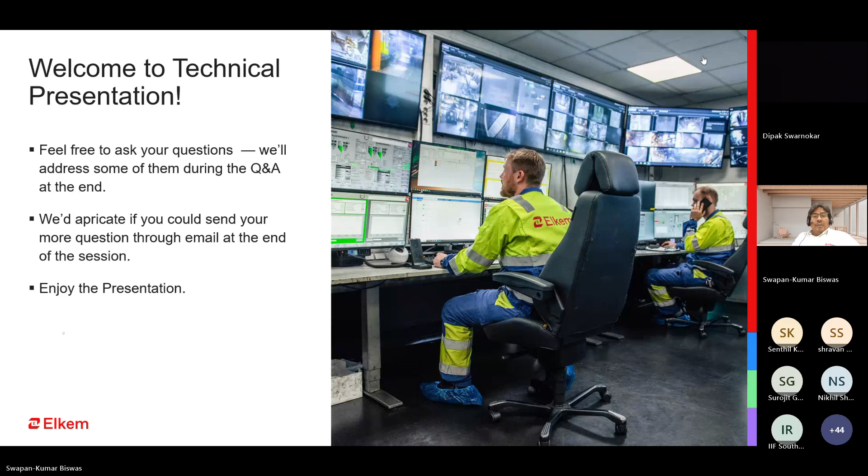I'll give some background. From 1943 you can say ductile iron production started with pig iron, but now there are a lot of changes. If you think about ductile iron production with pig iron, everybody will think twice, but that was the beginning. Now there are a lot of changes—thinking process, raw material availability, and expertise helping foundry personnel improve the metallurgy.

In ductile iron or gray iron, you always need to focus on the nucleation booster—that is primary from the liquid metal. Whatever casting process you are applying, first you have to think, when metal is ready, what is the nucleation level. Gray and ductile iron are the same when the metal is inside the furnace, but after magnesium treatment, that metal converts into ductile iron.

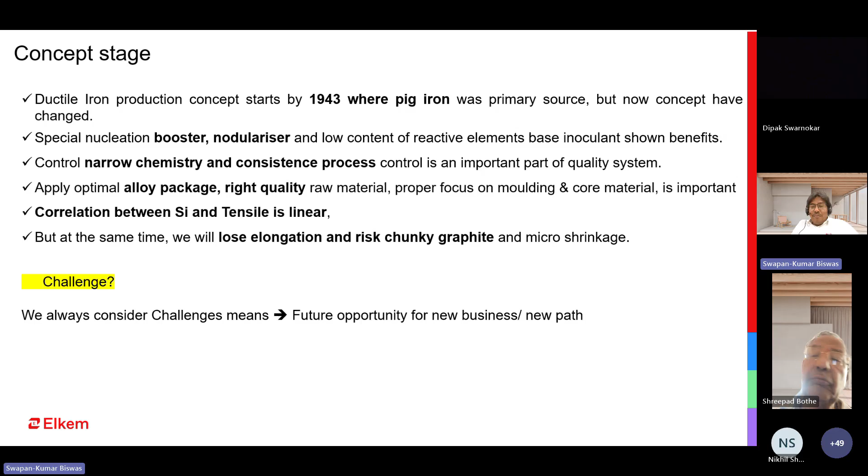Everybody knows there is a relation between silicon and tensile strength—it's linear, but when you increase the silicon level, there will be other problems, like chances of chunky graphite. So you have to decide which is the best option. When you take care of these challenges, it will definitely give a new business path and new opportunity. Challenges should be accepted and worked on—there will be a positive outcome.

Due to the complexity in casting geometry and stringent requirements, predicting shrinkage behavior in ductile iron is more crucial for successful foundry operation. This shrinkage is the most common defect in both gray and ductile iron, but identification is most important. Normally, most foundries study only a few defects—slag or sand related defects, and gas or blowhole—but very rarely do they check the micro structure to find out the type of defect, whether shrinkage, gas related, or nitrogen in case of gray iron. It's very important to identify the defect before taking corrective action.

Otherwise, whatever action you take may not give the outcome or result quickly. So it's important to study the microstructure when facing any defect, and decide which type of defect it is, then you can take corrective action. Optimal treatment package is also very important—it helps get a consistent result considering metallurgical and mechanical properties.

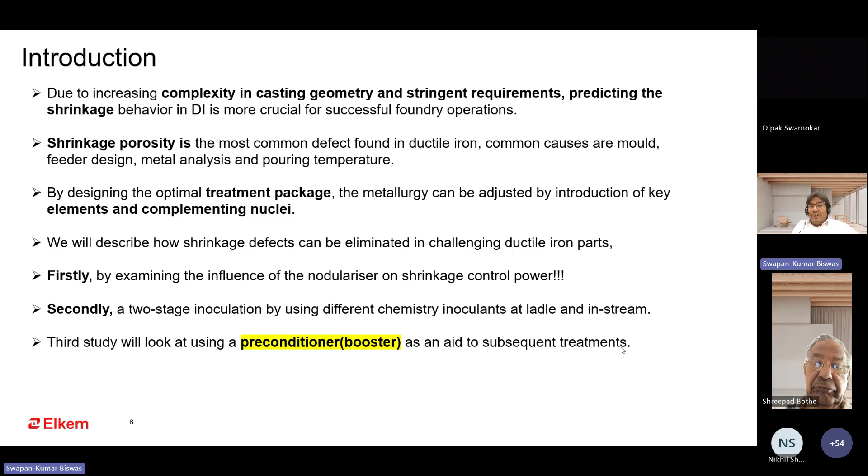So that is also most important. You need to check your metal nucleation potential before taking this action. Then it will help. So in shrinkage phenomena, then you can see this slide.

When metal is in the liquid condition, this volume is more. But when that liquid metal converts from liquid to solid, when solidification takes place, there will be graphite precipitation, and there is a huge expansion in volume. So that is the most fundamental.

So whatever carbon you are using in the furnace, that recarburizer should convert into free carbon, which is called graphite. When your graphite precipitation and distribution is very good and definite, it will help to control most of the metallurgical related defects.

This is when expansion is going on with this graphite, so you need more graphite precipitation. During solidification, everybody knows there will be contraction as a metal phenomenon - it will contract, and when this graphite precipitates, it will expand. So when these two parameters are almost similar, then you will get defect-free casting. So graphite precipitation is in our hand, but during solidification metal contraction is the metal's characteristic.

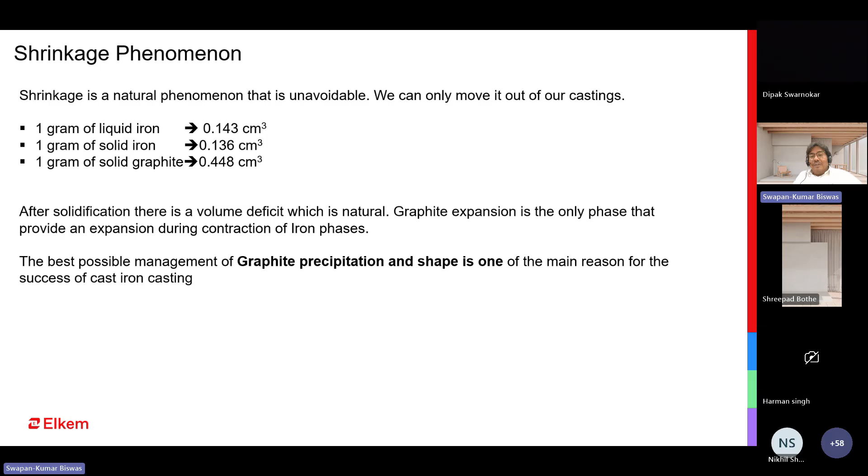So always tap metal as quick as possible, within 1 minute. Then it will give better magnesium recovery. So that part needs to be taken care of during the production of ductile iron.

So there are three different categories of shrinkage - one is physical, chemical, then third is process related. In physical related, that will be the mold or your gating system, sand metal ratio. So this part needs to be taken care of to overcome shrinkage related issues.

In case of chemical factor, carbon equivalent is the most important, along with other trace elements, especially chromium, titanium, vanadium, antimony. All these trace elements need to be considered.

Also another parameter is the residual magnesium. Most of the time, foundrymen think that if residual magnesium is on the higher side, then there will be no compacted graphite - that is correct. But on the other side, it will increase the shrinkage tendency, because magnesium is a very strong carbide promoter.

When your residual magnesium is on the higher side, there is always a tendency for carbide formation, and you will get less nodule count. When nodule count is on the lower side, then your shrinkage tendency will increase. So on one side you are protected - there will be no compacted graphite due to high residual magnesium - but on the other side you will face other metallurgical problems. So optimum residual magnesium is the most important factor for ductile iron.

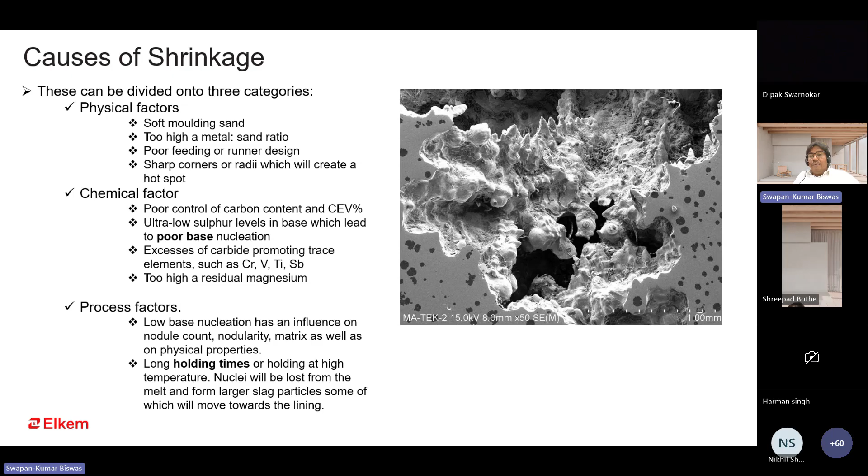There is one case study on how this shrinkage is eliminated. There is a lot of other information, but here is only the outcome of our exercise. So there are two pictures on the left side, shrinkage versus residual magnesium.

When your residual magnesium increases, there is always a tendency for more shrinkage. And another graph shows magnesium content with nodule count. You have seen lower residual magnesium always gives a higher nodule count. That means high nodule count helps to control your metallurgical shrinkage.

So on the right side, there are two pictures using two different packages. One is the left side graphite structure, containing ferrosilicon magnesium with mish metal content and calcium barium based inoculant. But on the extreme right side, there is lanthanum based ferrosilicon magnesium, with cerium based inoculant, specially coated with oxygen and sulfur.

So in both cases, you can see there is a huge difference in the nodule count. Both are the same metal, same chemistry, but the two structures have different graphite formation. So when your nodule count and nodularity increase, you are able to eliminate micro shrinkage or micro porosity. With the help of better ferrosilicon magnesium and cerium based inoculant, it helps to minimize or completely eliminate the shrinkage defect.

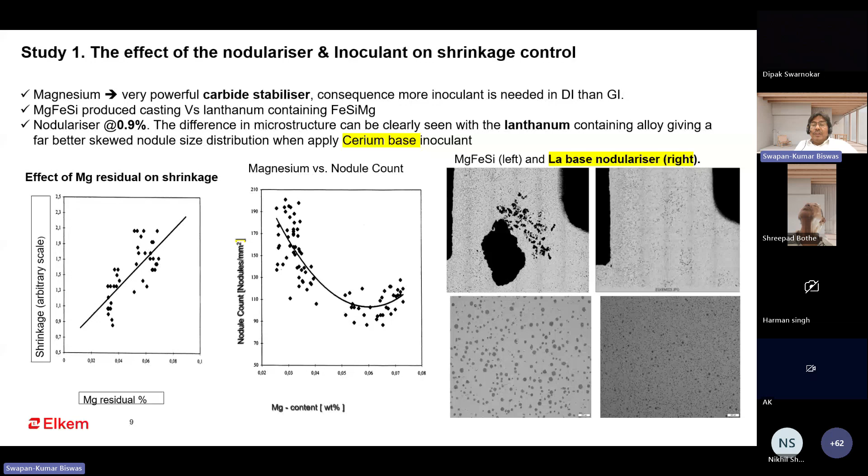So the best possible way to cure this shrinkage, you have to follow the correct carbon equivalent and carbon-silicon ratio. Also control the residual magnesium and sulfur level. You need to check the nucleation by adding a long-lasting preconditioner, which helps to maintain the nucleation level for a longer time.

Also, to overcome this microporosity, you have to select an inoculant which can provide secondary graphite precipitation. In most cases, calcium barium gives a huge number of graphite precipitations at the initial stage, and later there will be very few nodules or flakes forming. So you have to select an inoculant that provides graphite precipitation from the starting to the last stage of solidification, which helps to control the microporosity.

When initial graphite precipitation is high, there are always more chances of expansion. But at the later stage, there is no nucleation site to create the last stage graphite expansion or precipitation. So only cerium containing inoculant gives primary plus secondary graphite precipitation. You have to select this inoculant along with your ferrosilicon magnesium to help control the microporosity. With barium base alone, you will not get 100% benefit to control microporosity.

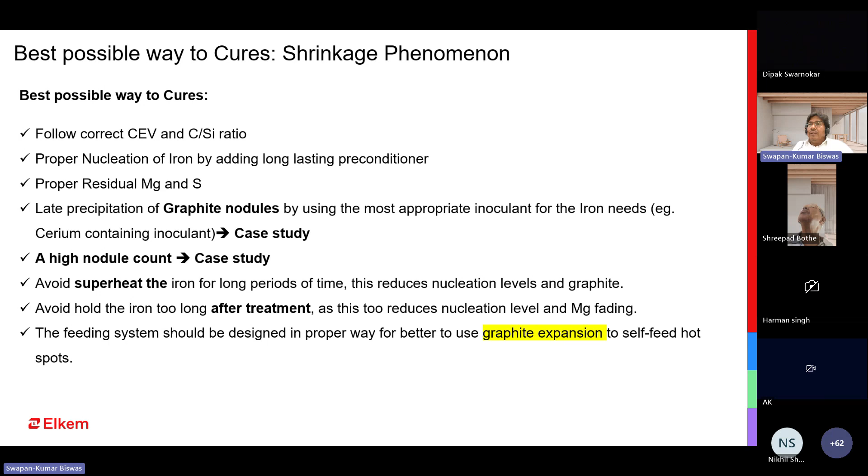So this is one case study where the customer was facing a metallurgical challenge, especially shrinkage. But with this casting, with the help of a high performing inoculant plus magnesium combination, they were able to produce defect-free casting even without a riser.

That is the initial stage when our team member visits various customers. We always try to collect information on the existing condition, because whenever you do any activity, you need to know the starting point. So then you can take corrective action. Without this information or the starting point, you cannot decide the next course of action.

Then based on their initial information, we suggested a package. In most cases and case studies, we always recommend a preconditioner, because this is the primary action and it helps to overcome a lot of variation. Because when your metal condition, meaning your metal health, is on the better side, definitely your outcome will be better.

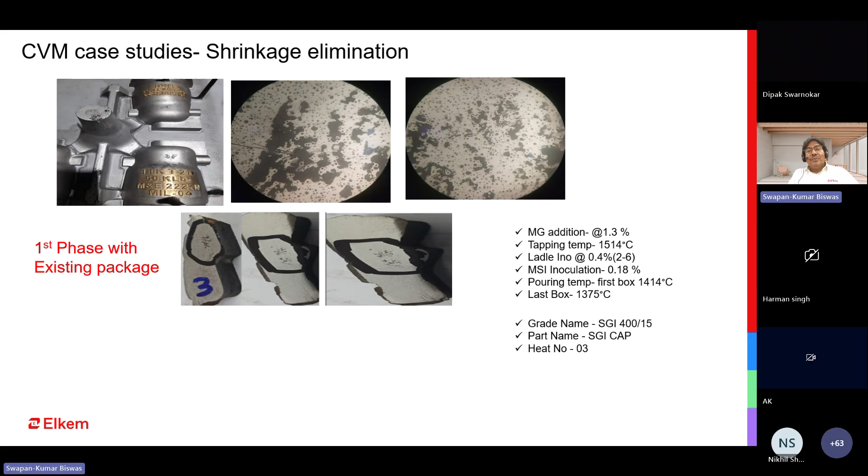In the last stage, you can see there is a huge change in the microstructure, especially nodule size and distribution of nodules. When we started, this was the structure, and at the last stage when our activity is completed, you can see this is the structure.

That is the change, the same metal, same chemistry, but huge improvement on the microstructure. This casting was poured without riser, and they found complete zero shrinkage without riser. So this is the value creation. Whatever this riser quantity of metal, that is the saving. Yes, there will be some increase in your treatment cost, but you have to calculate what is the increase on the treatment cost and what is the benefit and yield improvement. If you compare both, then definitely you will find the benefit.

Another thing, when there is consistent result, every heat will give similar metallurgical result. When you send this casting to your customer side, there will be no chances for rejection at the customer side. It gives a huge negative impact when this casting fails at the customer side, OEM end. So you have to take this corrective action at your end. Definitely it will help for the long term.

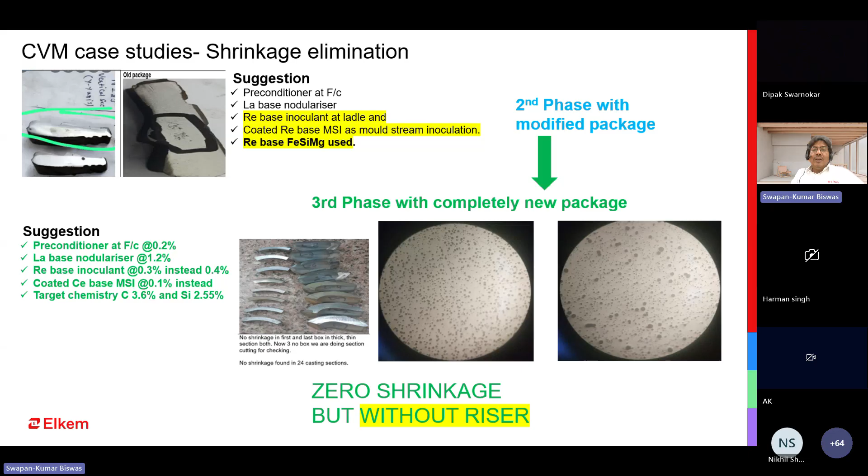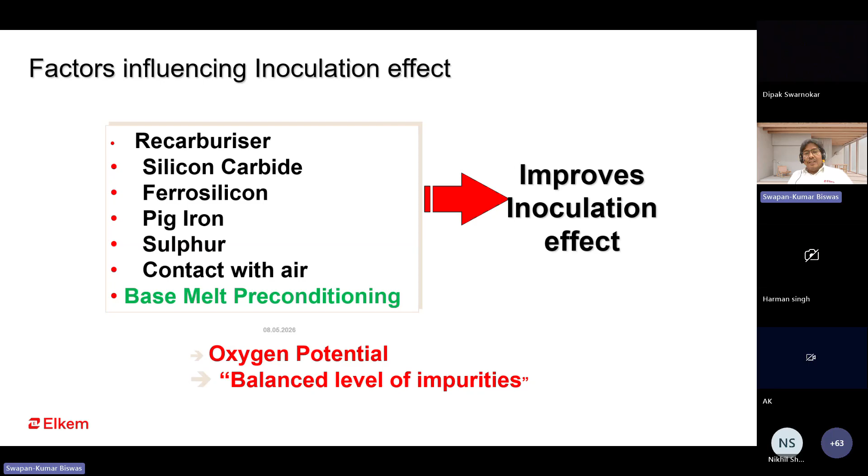This case study with preconditioner shows how it is helping on the machinability. This material you can use as a conditioner. It will help the inoculation effect. Base melt preconditioning is most important, because it maintains or holds the oxygen potential in the metal and also balances the impurities. You need certain inclusions that help improve the nucleation.

So sometimes people use a little rust scrap. That rust scrap, maybe in pig iron also there will be some rust. This rust is iron oxide. When you add it into the melt furnace, it enhances the oxygen level inside, which also helps improve the nucleation side. But addition should be limited, because it's a temporary effect, and when you add more rust scrap, it creates other problems - a lot of slag formation, and maybe metal flashes will take place during adding. To avoid all this, we always suggest going with a good preconditioner that helps overcome all these challenges.

So this is the benefit we can get from this preconditioner, that contains aluminum and zirconium. Last parameter: improvement on machinability and variation, reduction on casting variation.

In this parameter, you can see there is one foundry study we did. They found they are using silicon carbide around 1% in the furnace, and rejection was 1.1%, very less, no doubt. At the machine shop, they were able to machine around 635 numbers of castings. And when we suggested going with this high performing preconditioner with 0.1% instead of 1%...

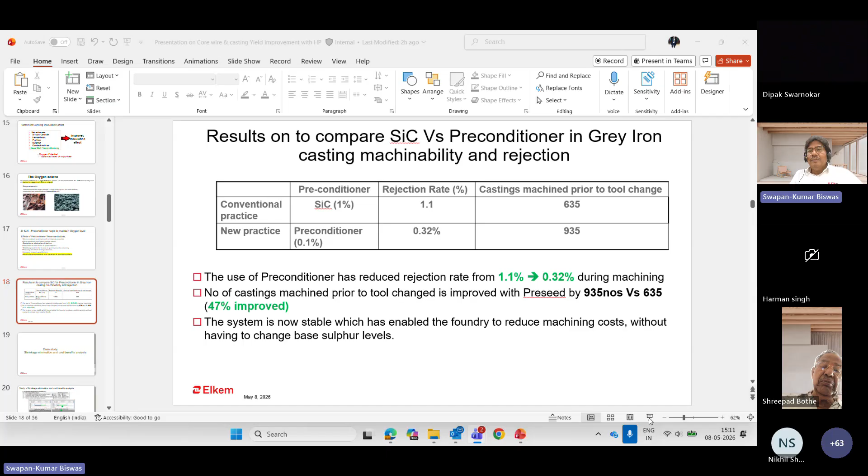Swapan sir, yes sir, am I audible? Yeah. Sir, your screen is not visible. I think you have to reshare again. Just a minute. Put it in full screen, sir. Yeah, it's okay. Okay.

So when they went for this preconditioner with 0.1%, you can see the rejection came down to 0.32%, and the number of castings they were able to machine with a single tool is 935. So there is a change of around 47% improvement on machinability. Now you can calculate which is the beneficial cost part, going with silicon carbide at 1% with 1.1% rejection, or with the preconditioner. When we demonstrated to the foundries, they switched over from their earlier package to this new package.

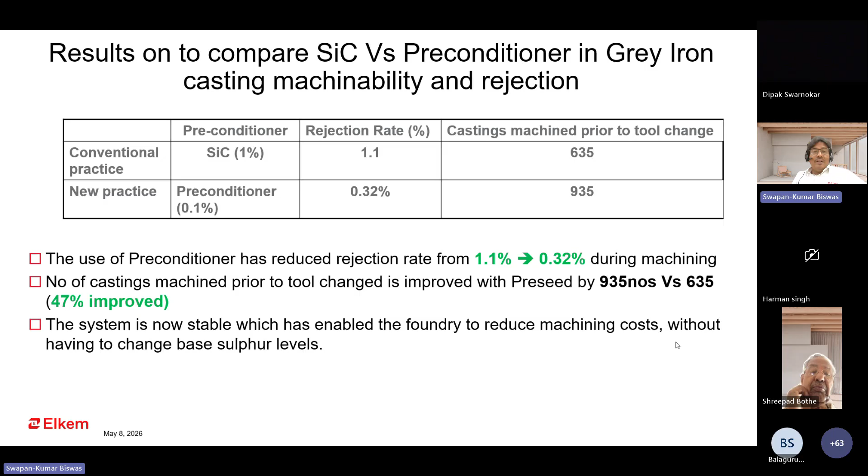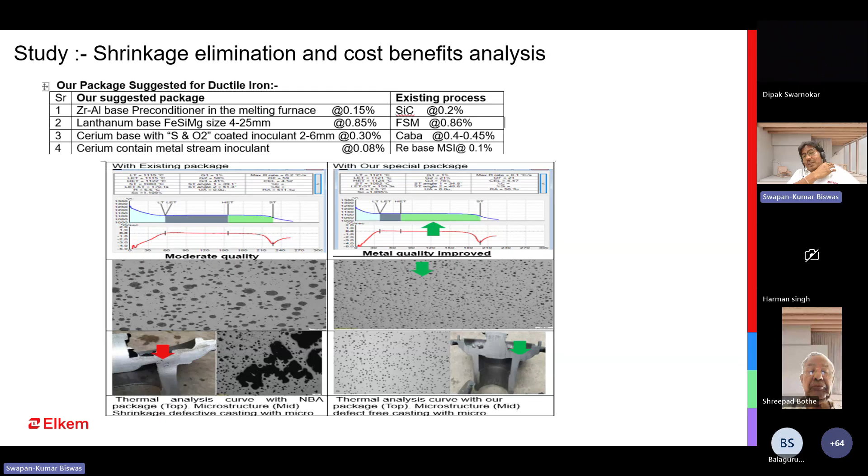So then this is the right side structure. You can see this casting photo with microstructure - that is the huge change. After that, we did this analysis on what is the yield improvement. Earlier they were getting around 55%. Later on with this combination it is around 70%.

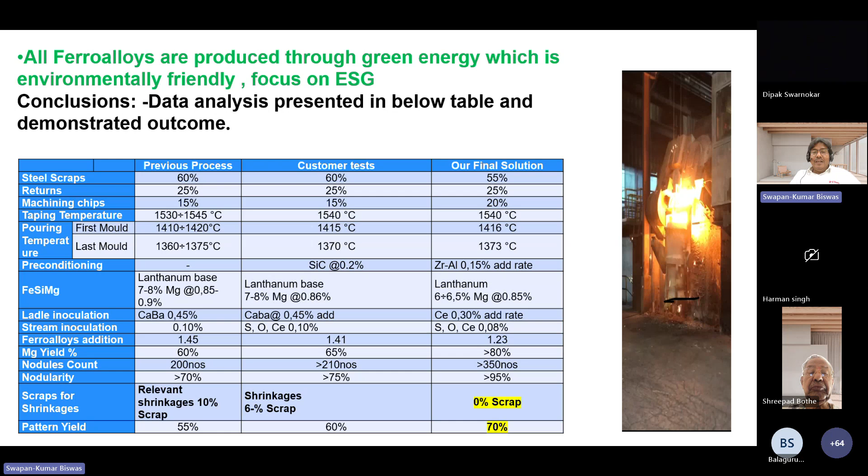They also did this cost calculation - what is the benefit. I have not mentioned the numbers here, but they calculated the difference in treatment cost with the new package versus the earlier one. There is extra inoculation cost, but other improvement areas like nodule count and reduced shrinkage defect are the plus side. Also reduced development time and cost, and machining effect. Altogether, for that particular component, they found it is around 4 lakhs per month savings. So from there they decided to go for the full package on all components where they are facing challenges.

So when we are working with foundries, myself as our technical team member, along with my colleague Balaguru and Shubinay, we visit various foundries and always try to do thermal analysis, check the current condition, then we recommend which combination will be the best choice for them. Till the last stage we do all this calculation and present the cost benefit analysis to the customer.

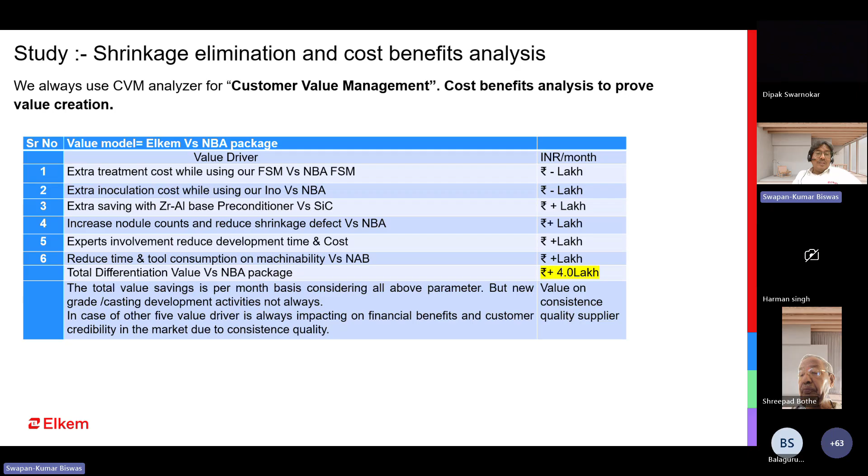So this is the thermal analysis graph. When you go through this, it gives the idea. The micro shrinkage and porosity is mostly process related - carbon equivalent, silicon level, residual magnesium is most important, and holding time. In case of shrinkage porosity, then phosphorus, niobium, vanadium, and time. This element, most of the cases, people overlook. They mostly check residual magnesium, carbon equivalent, silicon and some other elements, but this is most important to control the microporosity.

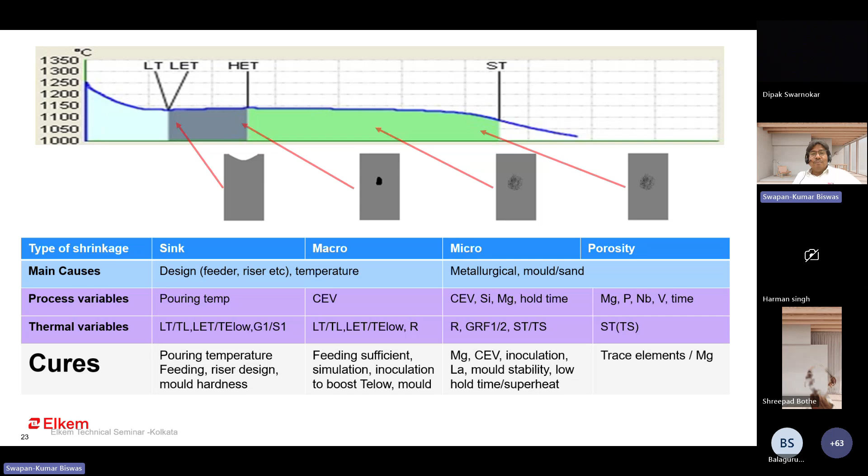So from all this case study, there is a summary I have demonstrated here. Lanthanum-containing ferrosilicon magnesium is more beneficial to control the micro shrinkage. Preconditioner containing aluminum-zirconium base is always beneficial, and most foundries who already use it are going in that direction. Also, for reduction of shrinkage, your nodulity and nodule count is most important. You have to select the parameter and alloy package which can give high nodulity and nodule count - it is beneficial to control the micro shrinkage.

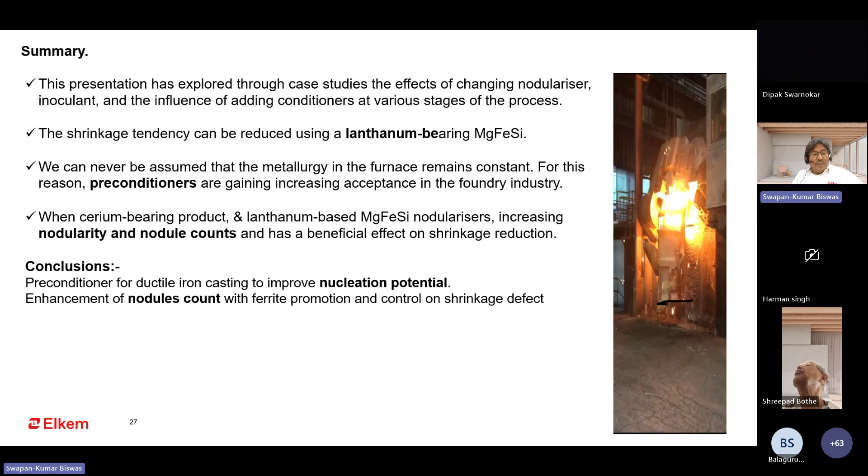So in conclusion, preconditioner for ductile iron is important to improve the nucleation potential - same for gray iron also. Enhancement of nodule count will help get more ferrite content and control micro shrinkage. This is the benefit, so nodule count increase has a lot of benefit. It will also help improve machinability - more graphite precipitation, either flake or nodules, gives better machinability. So you have to select a combination that helps precipitate more graphite, either flake or nodules. This is for ductile iron - a high performing package combination that helps improve the yield.

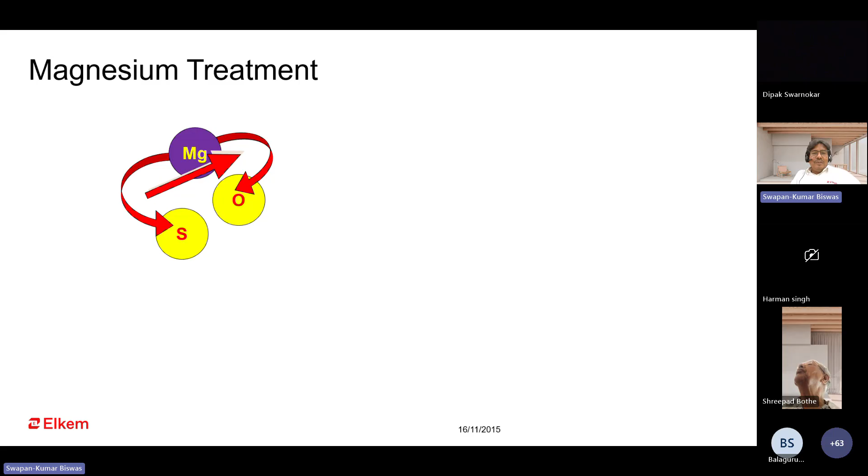So the next topic will be cored wire treatment. In any magnesium treatment, normally when doing ferrosilicon magnesium treatment, there are two effects going on - this is for the sandwich process. Magnesium, even in cored wire, will react with sulfur and also with oxygen. So two effects: desulfurization and deoxidation. After this magnesium treatment, there is a lot of MgO - magnesium oxide, sulfide, and magnesium silicon particles. Some will be bigger in size and go to the slag, and some will be very small - it will create nucleation sites.

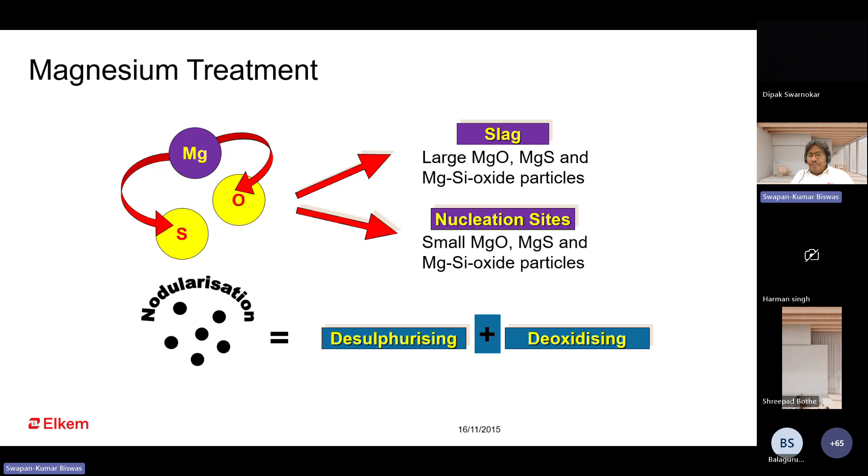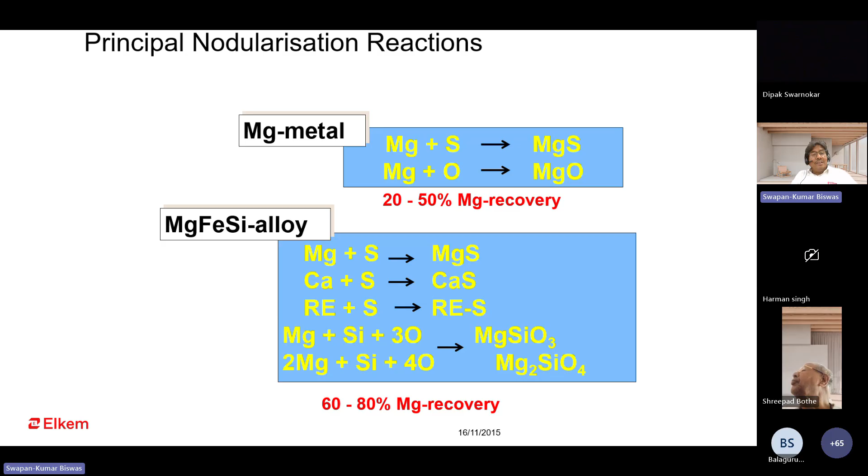So when you go for ferrosilicon magnesium as a treatment alloy, there is a lot of reactant product - magnesium sulfide, calcium sulfide, rare earth containing compounds. But when you go for pure magnesium, only magnesium is there - there are only two ingredients, magnesium oxide and sulfide. So from here you can imagine the level of nucleation after magnesium treatment in both cases - pure magnesium treatment versus ferrosilicon magnesium through sandwich process. There is a huge difference in the metal quality you get after magnesium treatment, so you can imagine the effect on the final castings. With pure magnesium, recovery is on the lower side; in case of sandwich process, you can get up to 80% magnesium recovery. So you have to calculate the benefit of recovery, and also the nucleation that improves metal health.

On the positive side, mostly your consumption will be lower than sandwich process, no doubt. But when you are going to produce very critical and stringent components for automobile, your structure should be very good. When your nucleation effect is low, and there is more slag formation and more fumes, definitely in the final casting you will face a lot of metallurgical challenges.

So I'll show a few case studies where we have seen earlier with cored wire, and then later on the same foundry switched over to sandwich process.

Initially, yes, there will be a rosy picture that consumption is less compared to sandwich, and everybody thinks there will be cost benefit. Maybe initially you will find this benefit, but in the long term you will start facing these challenges, and there will be huge metallurgical issues.

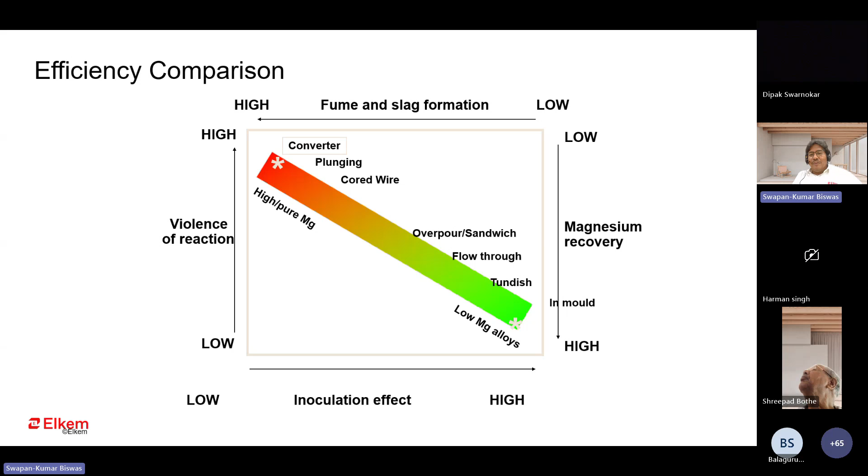So in India, most of the cases, for this reason they have shifted. This is our finding. Maybe other companies will think in a different way, but this is our strong belief.

It is a low cost and reliable automation, and also helps reduce manpower and handling. Also during treatment inside this foundry, fumes are not visible, but they come into the atmosphere through the exhaust, and there's potential cost reduction. That is the thinking.

Most of the cases, what is our study and observation? When there is a layout that's a little bit constrained and it's a small foundry, even without dedicated technical manpower, they are mostly thinking to shift from existing sandwich to cored wire.

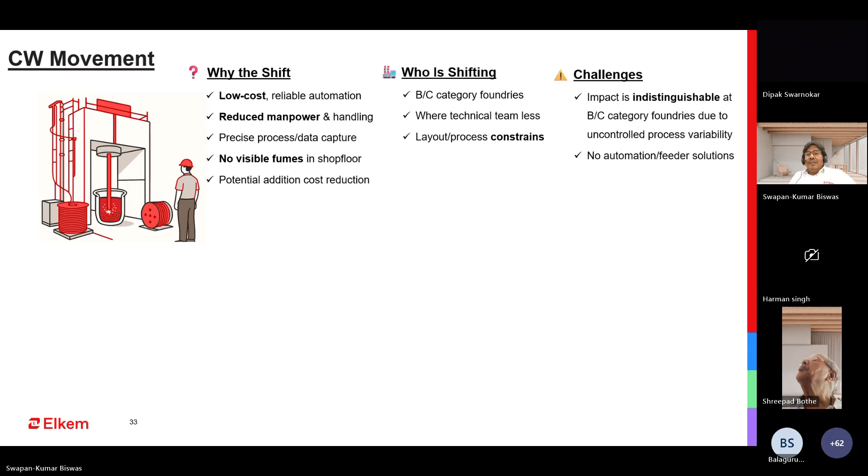Challenges there will be metallurgical related, and no automation or feeder solution is there, and they are doing this small B and C category work. These are the small industries who are thinking of going this route, cored wire treatment, due to some in-house issues.

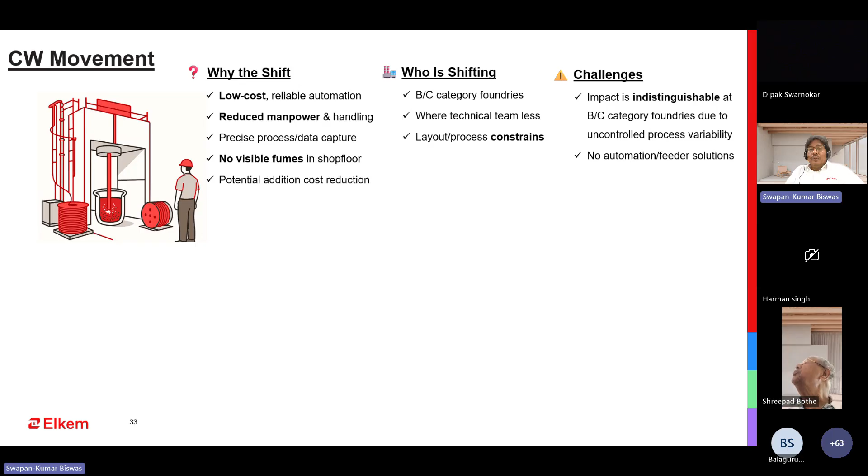Cored wire is the blend of ferrosilicon magnesium powder with pure magnesium. This is a combination. Typical composition is around 25% magnesium with calcium plus rare earth content, and the addition rate, whatever we have observed, is around 0.4 to 0.5%, definitely lower than sandwich process.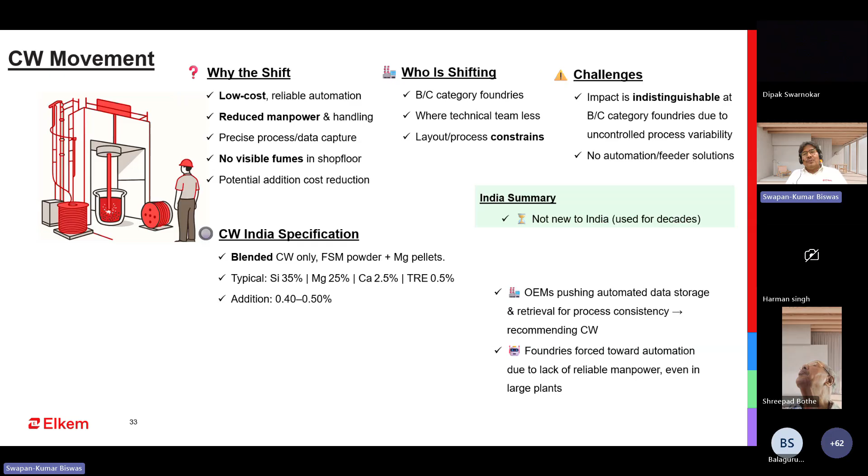Also, there is some demand from OEMs to go with this automation. So foundry people are thinking to change over from sandwich to cored wire because there will be some automation. So this is the on-site push.

But the challenge in this case is power cost, technology, skill gap in the workforce, and also raw material related issues. This is the challenge for everybody, either sandwich or cored wire related.

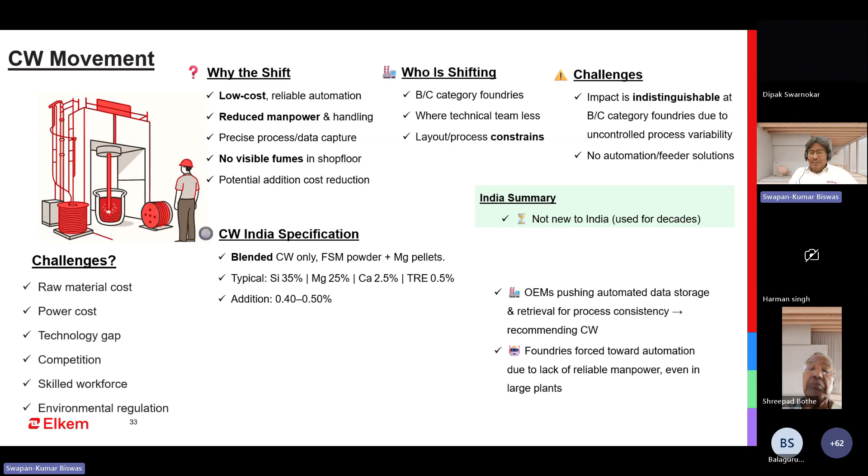When somebody is recommending cored wire, they claim the advantage is that the addition rate will be less and more accurate on the quantity. And from an EHS environment point of view, there will be no fumes inside the floor, and there will be less error on the weighing, so the quantity will be accurate.

This is the claimed advantage. But there is also inconsistency on core or homogeneity, whatever they are mixing or blending. If it is not homogeneous, then there will be variation from ladle to ladle. This is the most problematic area. Also, whatever wire they are using, there are chances of breaking during feeding, so that is also a quality related concern.

So in cost impact, if you calculate with this process, immediately, suppose when there is the cored wire, whatever we have observed, customers are changing their gating systems. They increase the riser and runner size to compensate for micro shrinkage, meaning they are compensating on the casting yield. So if you calculate how much you're gaining with this magnesium treatment and how much you're losing on yield when you increase the riser and runner size, then you get the real picture of whether it is really beneficial or not.

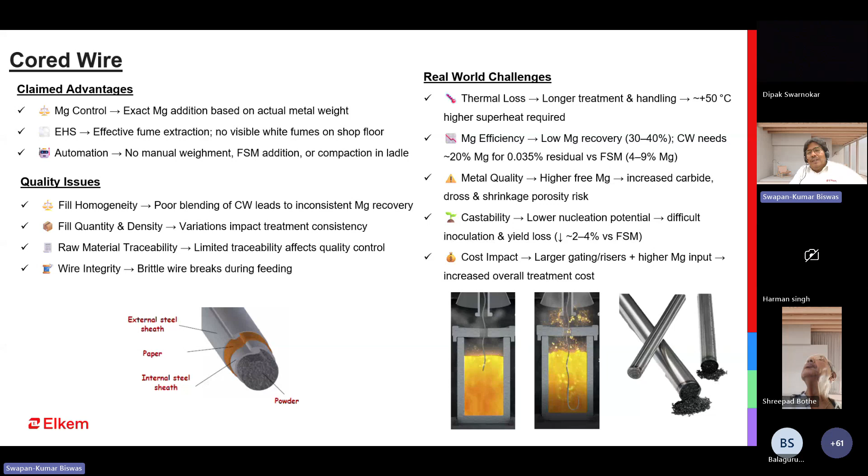So against all this advantage and disadvantage, there is some case study. This is on a foundry: they initially were with the sandwich process, then changed over to cored wire considering there is cost saving.

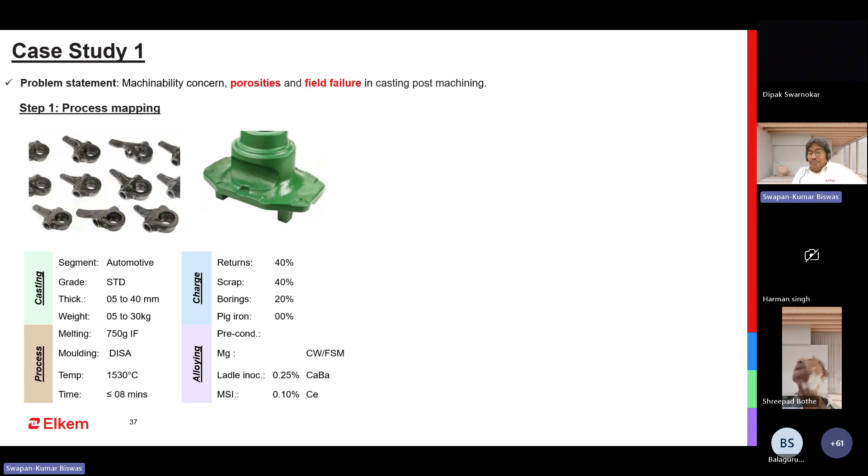So they found they started having porosity and field failure. It is a field failure, from when the casting is already fitted in the vehicle, so there is the failure.

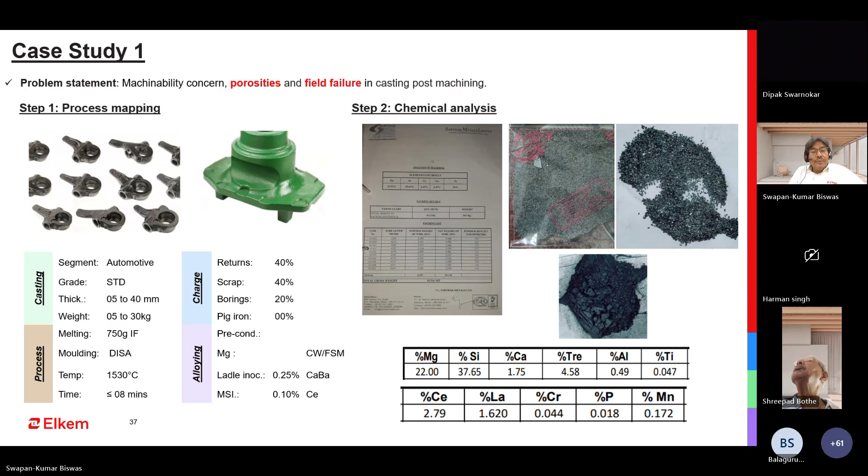So when our team, especially Balaguru and other team members, visited, they did this thermal analysis with the existing combination and with a new combination, this ferrosilicon sandwich process with lanthanum based ferrosilicon magnesium. In this picture you will get the idea. Normally, in case of the final G3, that is the green portion, it is the last graphite precipitation. If it is on the higher side, then you will get more nodule count.

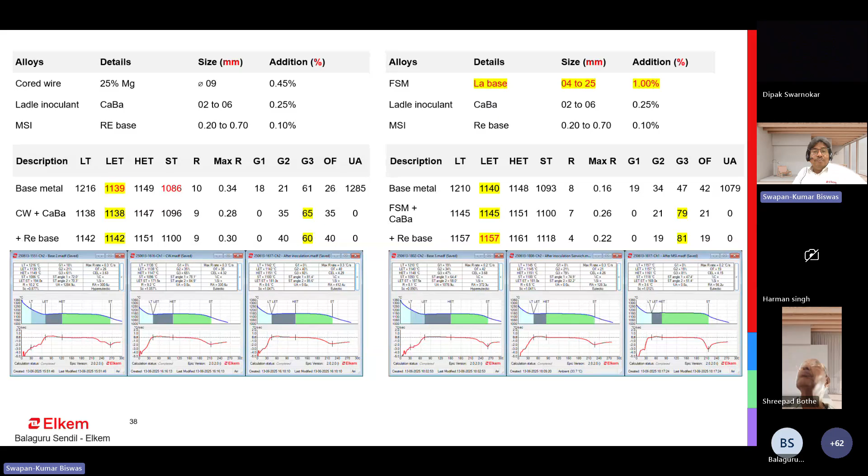That is a huge improvement in the LET, which is an indication of the metal nucleation level, and also G3 and ST angle. ST angle is the last stage, so that gives the indication of the shrinkage tendency of the castings. So when your G3 level increases and LET level increases, definitely there will be lower ST angle. But here, when they are putting this casting through cored wire treatment, the angle is also on the higher side and G3 is also on the lower side. So these are the changes, and later on they found they switched over from cored wire to sandwich because of these metallurgical challenges.

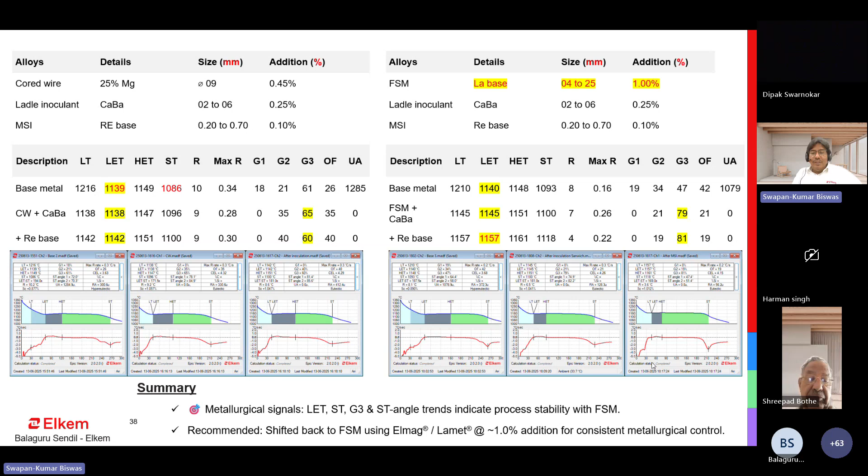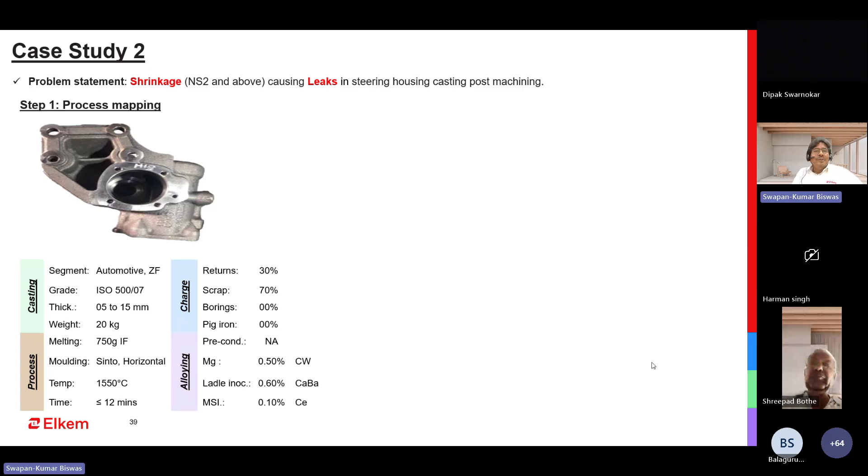There is one more study. There is a lot of study, but due to time constraints I'll go through only two. This is also about shrinkage and leakage, which they found in this pressure test. So this is the structure. When they are using cored wire treatment, scrap addition is around 70% and 30% return. And in the ladle, they are using around 0.6% calcium barium, and cored wire addition is around 0.5. As MSI inoculant, they are using 0.1% cerium based inoculant. This is the structure.

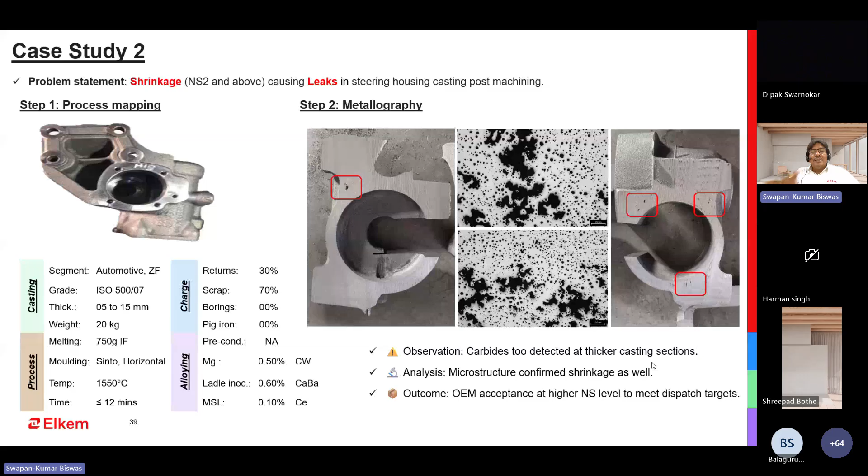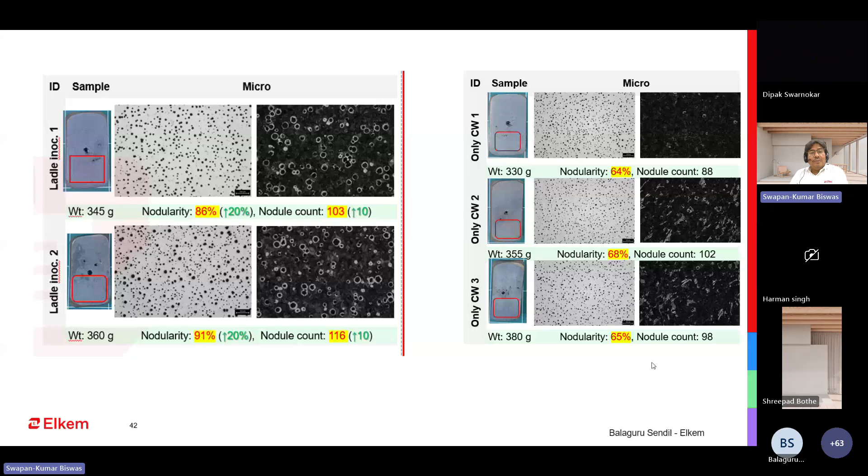And when they did this thermal analysis in two cases, on the left side it is with the new combination, which is lanthanum based ferrosilicon magnesium with cerium based inoculant. In both cases you can see these changes in nodularity and nodule count. So in most cases, based on our findings with different foundries who started cold wire, they are getting this type of structure more or less. Not everybody, but in most cases when the process and raw material selection, inoculant selection is not the right way, they get this type of structure.

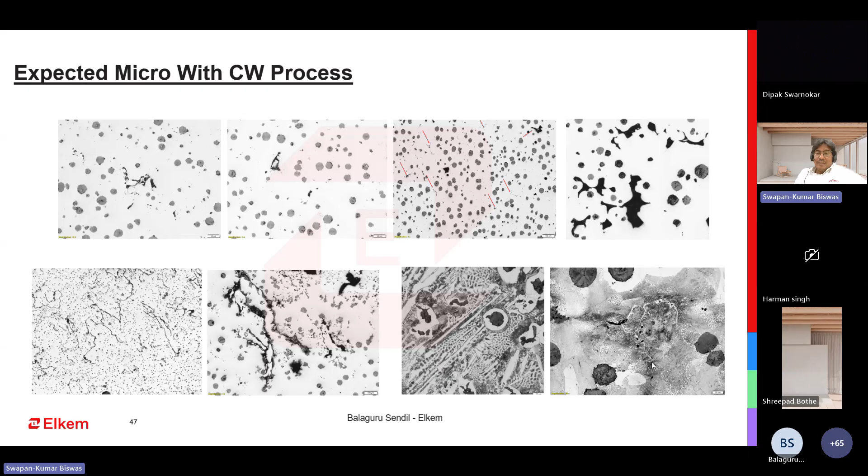In cold wire treatment, overall treatment cost is on the higher side, but there is a high rejection level. This is our finding. Higher tapping temperature is also another additional cost. And also casting yield is on the lower side, because they have to increase the riser systems a bit to compensate or neutralize the shrinkage related defect. And in our thinking, it is not completely eco-friendly. There is huge smoke, not inside but outside the plant. And higher pure magnesium consumption, and more or less magnesium is lost because when the recovery is less, it remains and goes into the slag, creating a lot of fume also.

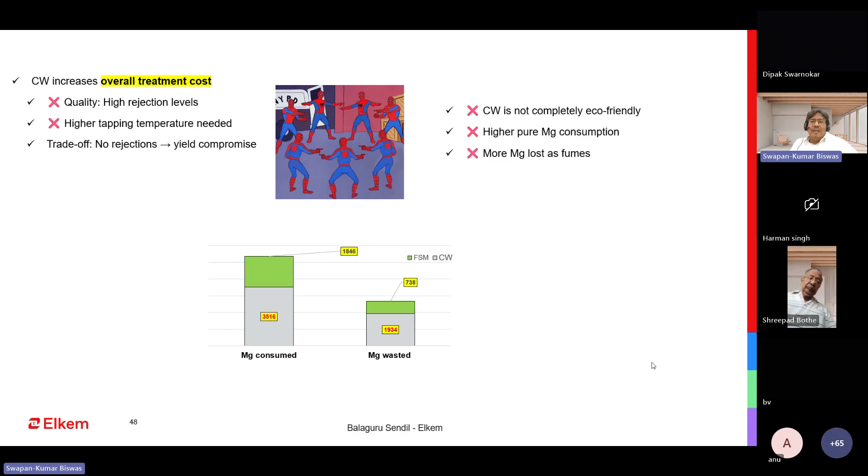So in short summary, for cold wire treatment there is a defect related to shrinkage, dross, and carbide. This is what we observe in most cases. And there is a lower casting yield, impacted by the increase in riser and runner thickness size, causing loss in overall casting yield. From a metallurgical point of view, there is inconsistency—there will always be variation heat to heat, and your magnesium recovery is on the lower side.

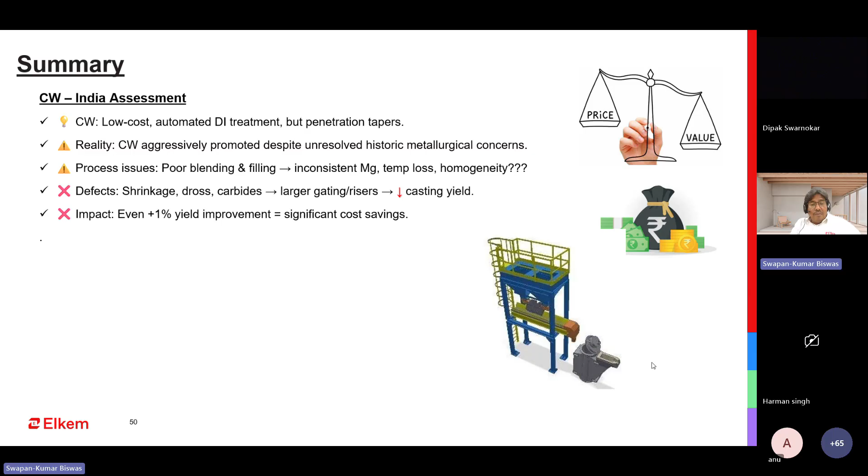This is the overall summary on cold wire treatment. But in general, in most cases, sandwich is the best method from a metallurgical point of view. So you have to decide which will be the better choice considering your casting profile and metallurgical requirement. From the customer requirement point of view, you have to decide whether you go for sandwich or powder. But our suggestion to customers is always to go with the sandwich process—that is the best method, considering the metallurgical parameters. Other, pure magnesium is not up to the mark from a metallurgical point of view.

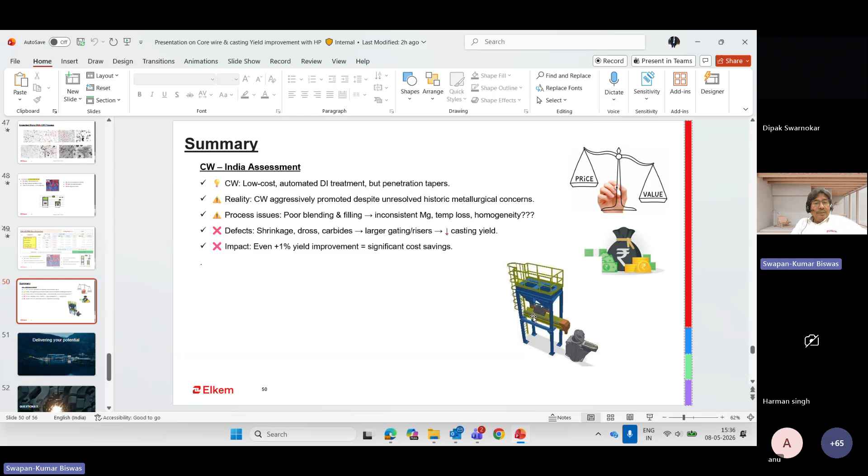So this is from my side. Maybe we can go for the question session.

Hello? Hello? Hello? You are audible, please continue.

Yeah, I have finished my presentation. So maybe we can go for the question and answer session.